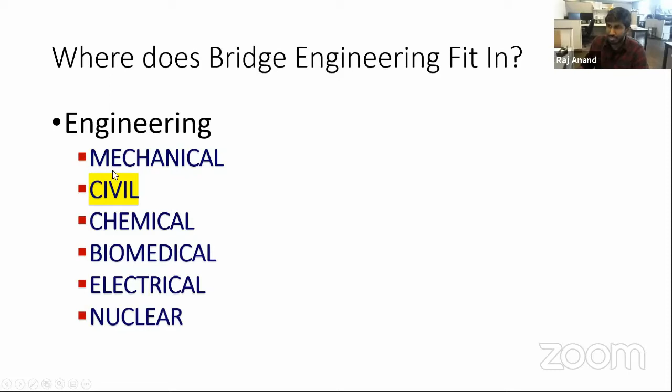For all the parents and kids listening, I want to give you a quick idea of where bridge engineering fits in the world of engineering. Engineering has a lot of disciplines: mechanical, civil, chemical, biomedical, electrical, nuclear. Bridge engineering comes into civil engineering, and civil engineering again has a lot of disciplines in it.

There's water resources engineering, which deals with all the water systems in cities—sewers, sewage, dams, all that stuff. Geotechnical engineering is the study of soil and earth and how it can support structures on top. Bridge engineering can again be classified into transportation and structural engineering.

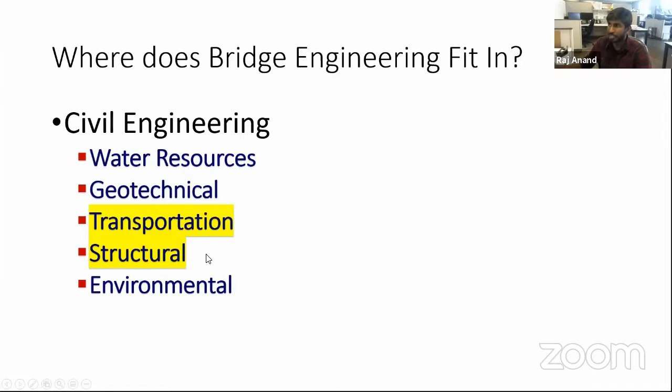Transportation engineering ties in because bridges carry cars and trucks and always tie into roads, so bridge engineering has a lot of transportation engineering in it, plus structural engineering to make sure the bridge can handle the loads we put on it. Structural engineering covers building design, bridge design, and specialty structures. That should give you an idea of where bridge engineering fits in.

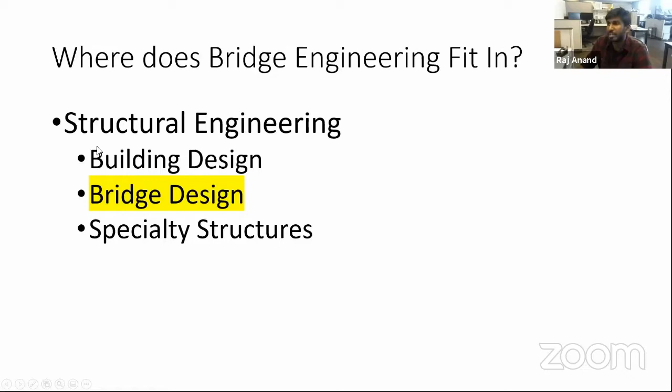A typical career path for someone who wants to pursue bridge engineering: you graduate high school, go to college, do a four-year bachelor's degree in civil engineering, and then if you want to specialize further you can get a master's degree in structural engineering or one of the other disciplines I talked about.

I personally have a master's degree in structural engineering. After you get 4 or 5 more years of experience on the job, you can apply to become a professional engineer, and with a bit more experience after that, you slowly start designing structures and stamping plans.

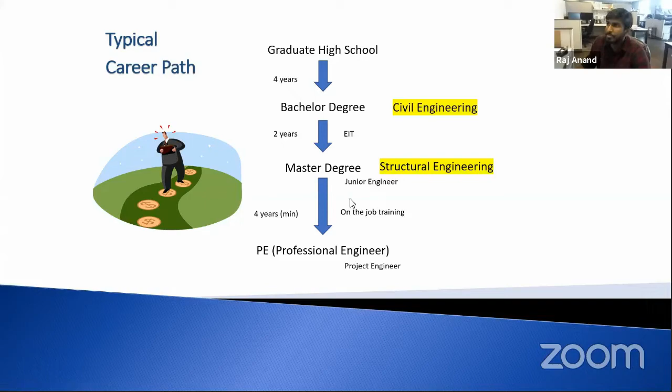Now let's get into bridges—a basic idea of what categories bridges fall into. There are essentially 4 kinds: beam bridges, arch bridges, truss bridges, and suspension bridges.

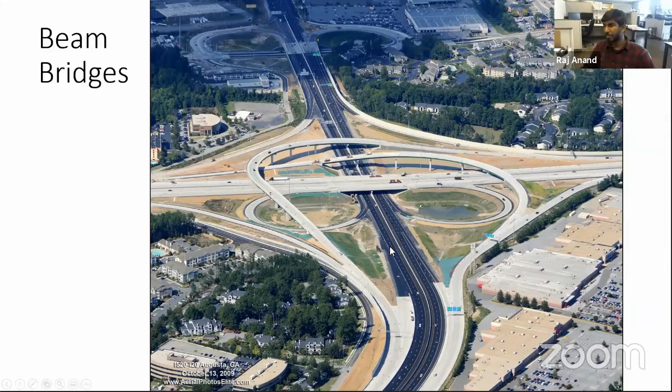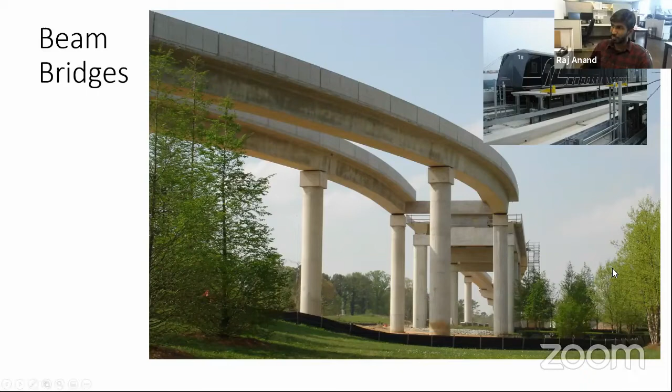Let's look at beam bridges first. These are the typical bridges you see every day—all highway bridges you drive over are essentially beam bridges, making up maybe 60–70% of all bridges in the world. Here's another example of a beam bridge: the train at the Atlanta airport that takes you from the airport to the rental car center.

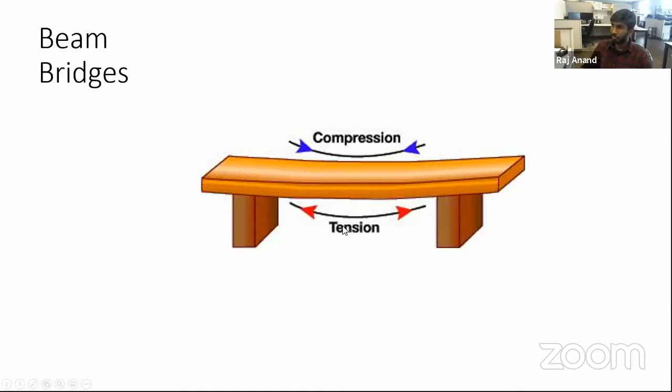A beam bridge works with an element that's working in bending—a single element. When it goes into bending, the top goes into compression and the bottom goes into tension, and that opposing force helps the element resist the load on top.

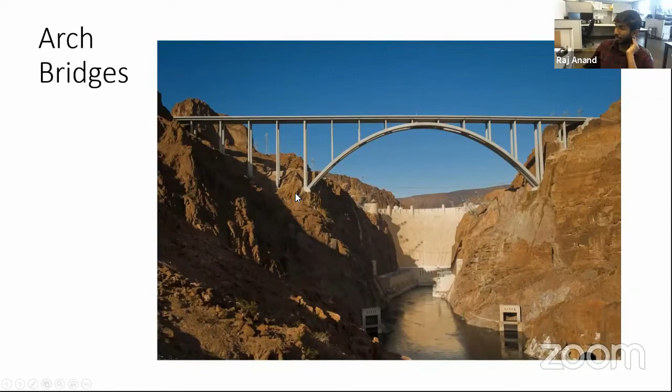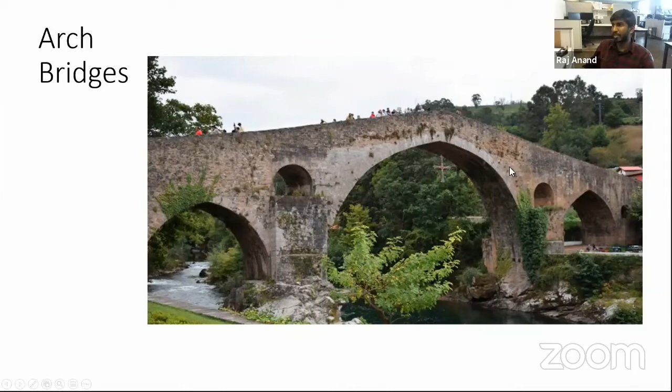Next let's look at arch bridges. This is the Hoover Bridge, near the Hoover Dam. Arch bridges have been around for a long time, maybe 2,000 years or more, even in the BC era. It's a very old type of bridge that's still used because it's still very strong.

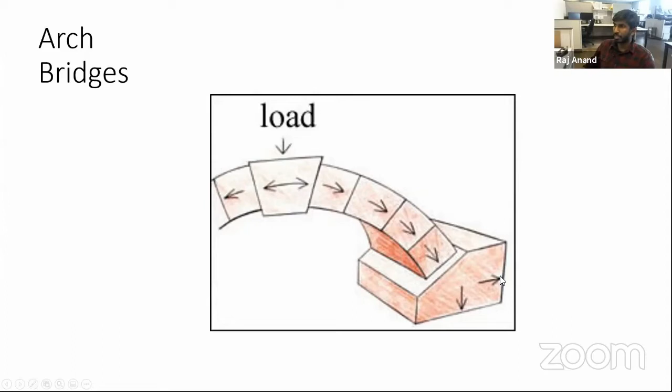An arch bridge works by putting load on the arch, which gets transferred through the arch into the supports at the ends that resist the force from the top. So for arch bridges, you really need good foundations at the ends of the arch, because the supports there are what help resist the load placed on top.

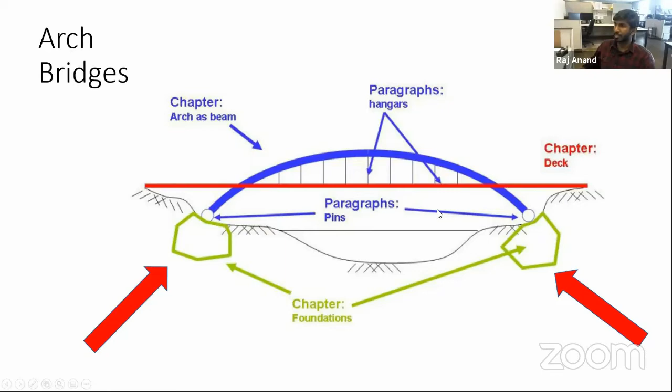Let's go into suspension bridges next. These are the longest span bridges in the world. They do have some drawbacks, being really flexible and susceptible to wind and earthquakes, but new technologies have enabled engineers to better simulate wind loads and earthquake loads, so these bridges are quite safe nowadays and are the longest bridges you see in the world today.

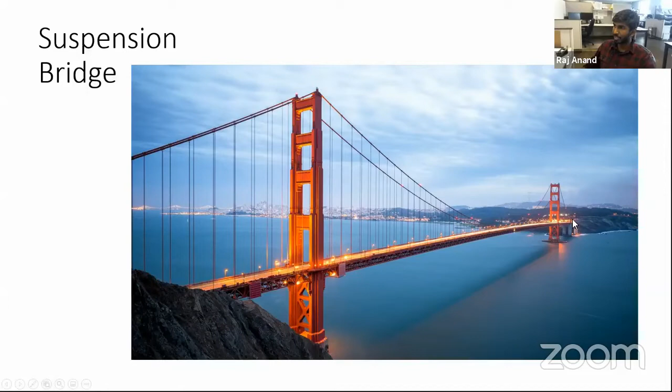This is the Golden Gate Bridge in San Francisco. A suspension bridge works by applying a load in the middle, which gets transferred through the cables up to the support and finally down through the cables to the ends.

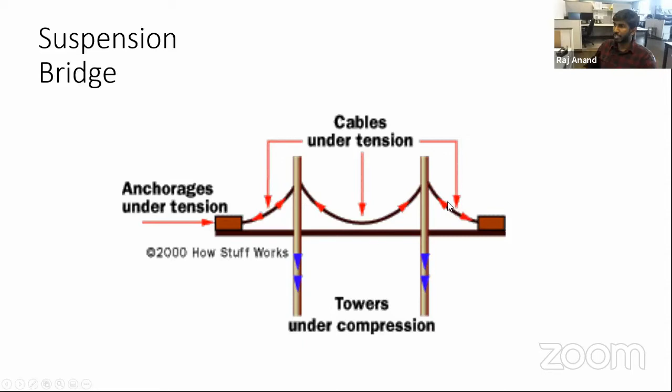And finally, let's talk about the truss bridge.

Truss bridges are more common than arch bridges and suspension bridges, but they're a little more rare than beam bridges.

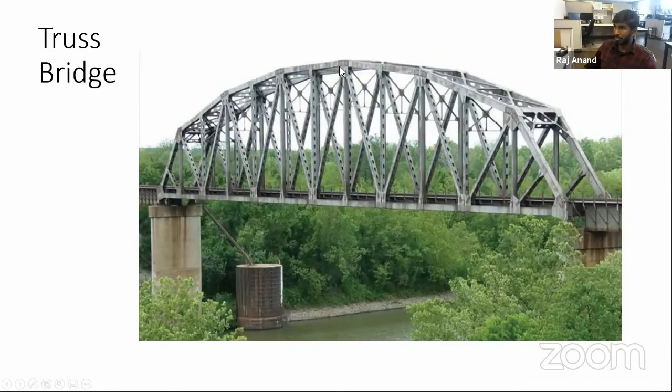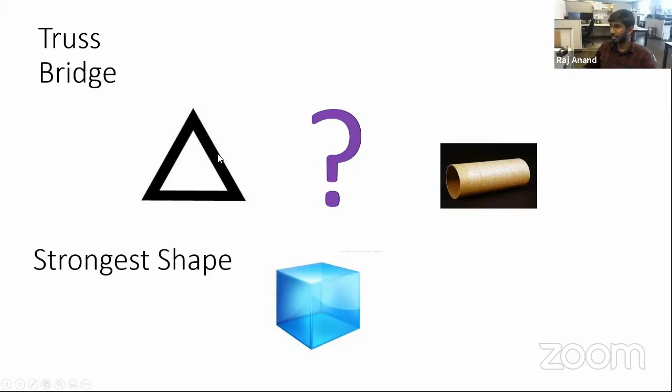Your truss bridge works because there's a series of triangles that are stable elements that help the bridge keep its shape. If you look at three shapes - a square, a circle, and a triangle - as structural engineers, we always prefer triangles because it's constrained on three sides, and it's difficult to change the shape of a triangle, and it doesn't laterally flatten down. So truss bridges are made of mostly triangles, and a load gets transferred to the end through a series of compression and tension members formed using the triangles.

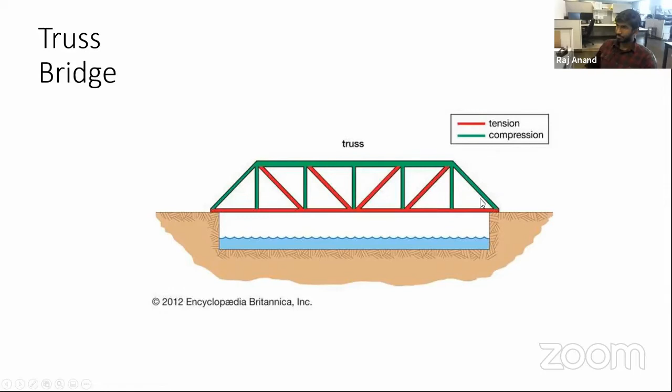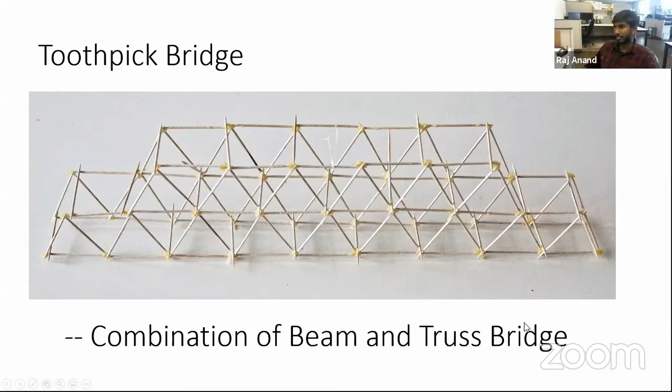So today we're doing the toothpick bridge competition, and this is an example here. I would say this is a combination of a beam bridge and a truss bridge. If you look at a single element, a microscopic or small element level, this is a truss bridge. But if you have a lot of these components, it essentially acts as a beam of sorts, so it's kind of a combination of beam and truss bridge.

Let's talk about how to design one of these, and what should go into the design process. Engineering is often a trial and error process. It has always evolved over time, where we've learned from our mistakes and gotten better and better. Our mistakes from the past have helped us make better, stronger, and safer structures in the future. That's a process you should try and use while designing one of these bridges.

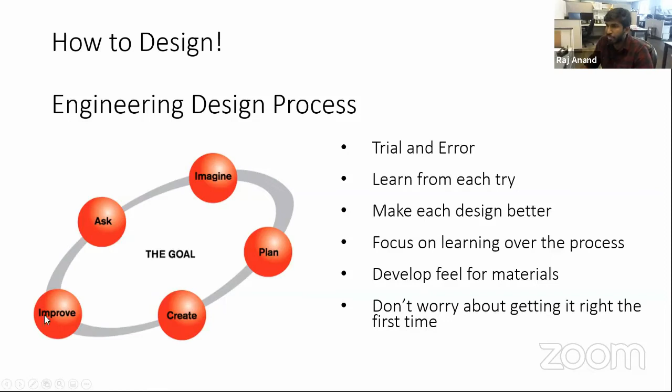Each time you make a bridge, try and see how it behaves, how it fails when it's being tested, and the next time you rebuild a new bridge, try to incorporate those mistakes and not make them again. Imagine what your bridge should look like, plan, build the bridge, and improve based on how it performs, and the process continues. I can give you some advice on how to build a bridge for next year, maybe if you're trying to attend next year's event.

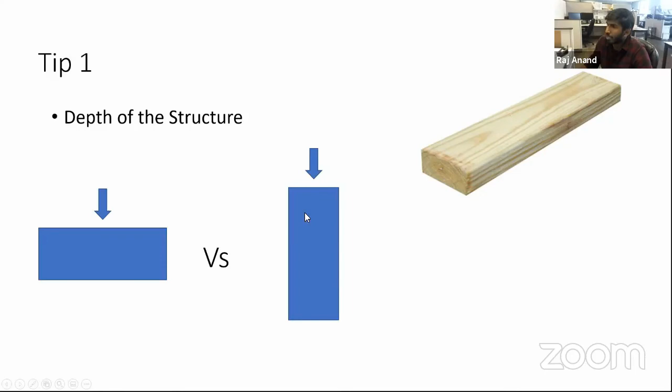To give you an example, let's say we have a 2x4. Think about whether it'll be stronger if you apply load on the flat side or through the long side. You can try it at home, and you'll probably find that applying load on the longer side has more strength and stiffness than the flatter one. So the deeper the bridge, the stronger it's going to be.

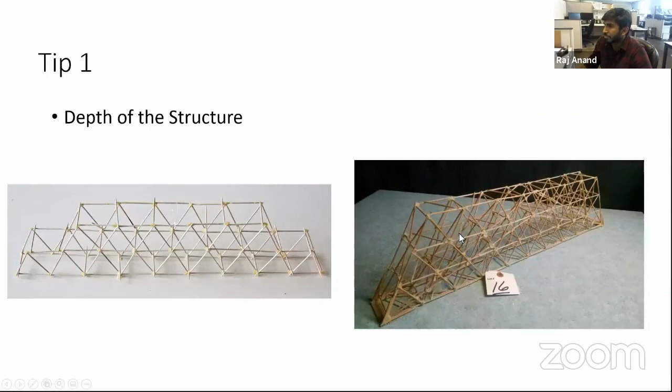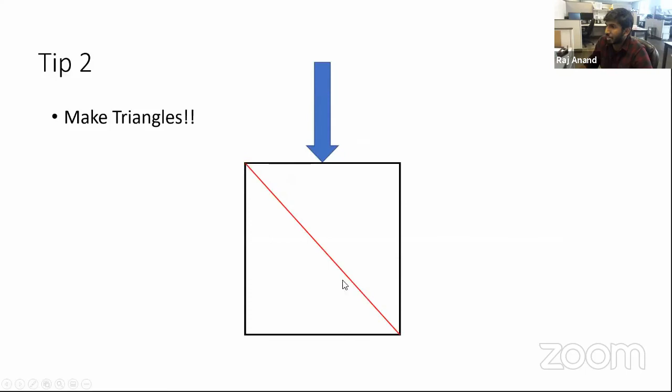The next tip is to make triangles. We always like triangles in structural design. If we have a square shape and apply a load, it has a tendency to sway laterally and fail. How do you fix this? You put a member diagonally - we call it diagonal bracing - and because of this member, it can no longer slide laterally, so it's stronger. Tip number 2 is always make triangles and avoid square shapes.

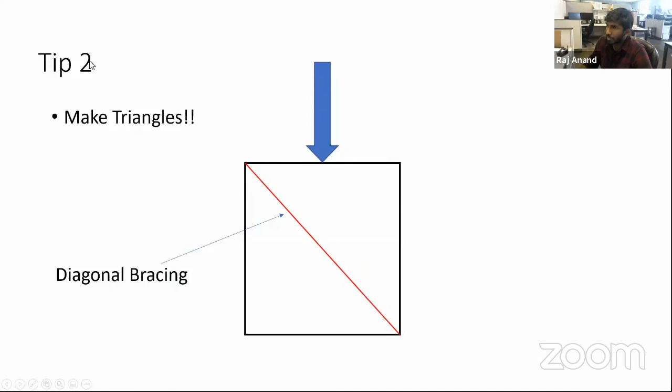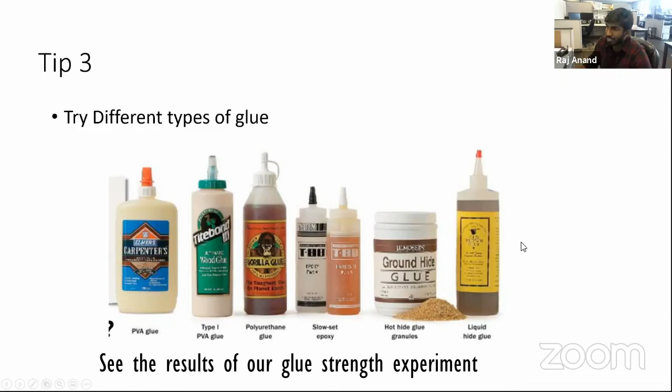Tip number 3 is you can try different types of glue. Different types of glue have advantages and disadvantages - some are very brittle and strong, while some can stretch a little more. You might want to make 2 bridges and try each with a different type of glue to see which one works best or is strongest. That's our 3rd tip for today.